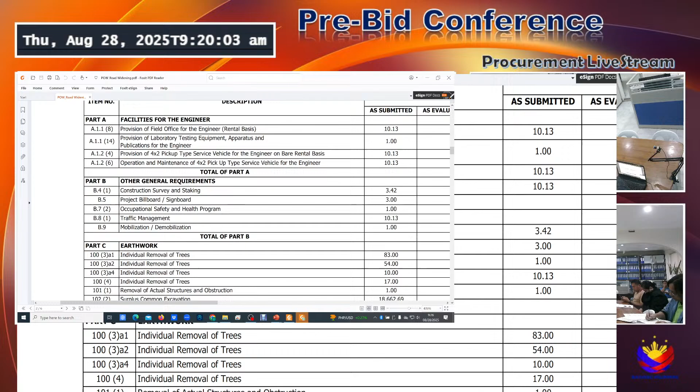I would like to emphasize this is actually item 1.1.11, which is provision of furniture, fixtures, equipment, and appliances for the field office for the engineer. Sorry for the error. With this item, these are the inclusions in this particular item.

With that particular item, 1.1.11, it includes the delivery of 3 specific units: desktop for special application use with complete accessories, 3 units; desktop for administrative application use, 2 units; and a 4-terabyte portable SSD, 1 unit. I would like to emphasize that during the preparation of your bid, make sure it is compliant with these 3 equipment items that will be delivered for our office, for the facilities for the engineer.

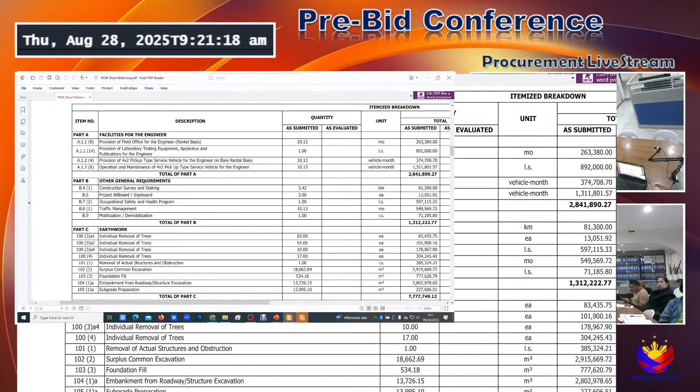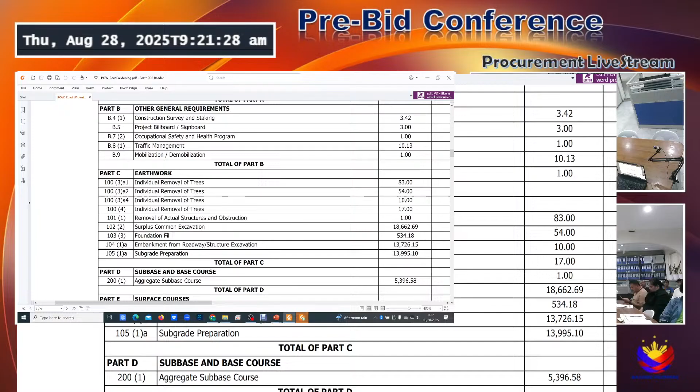We also have Part B, which covers the other general requirements, and these are the different items of work included in Part B. Also, Part C is earthworks, which includes removal of trees and other earthworks items. Part D is the sub-base and base course, and Part E is the surface courses, composed of Portland cement concrete, unreinforced.

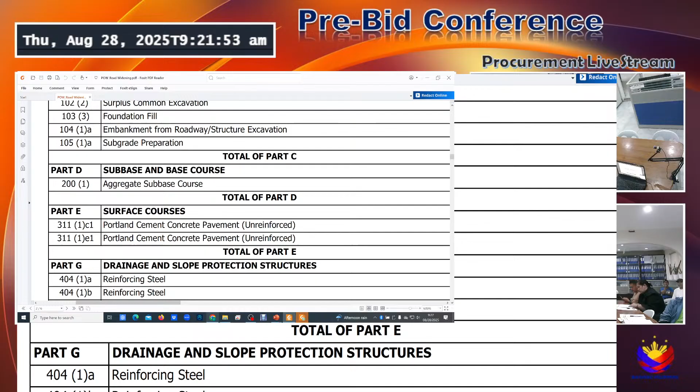This is actually 280 mm in thickness, and then the other one, item 311(1)e1, is actually 230 mm in thickness.

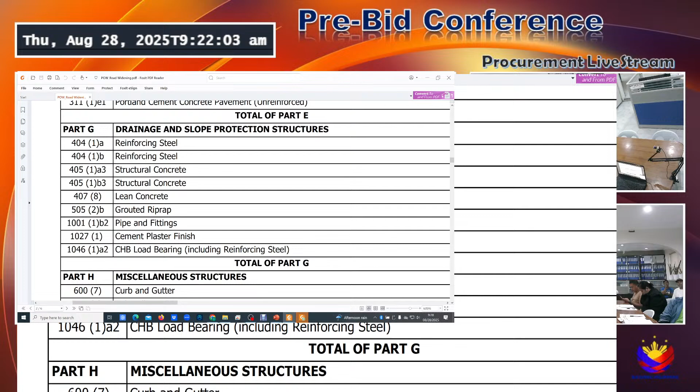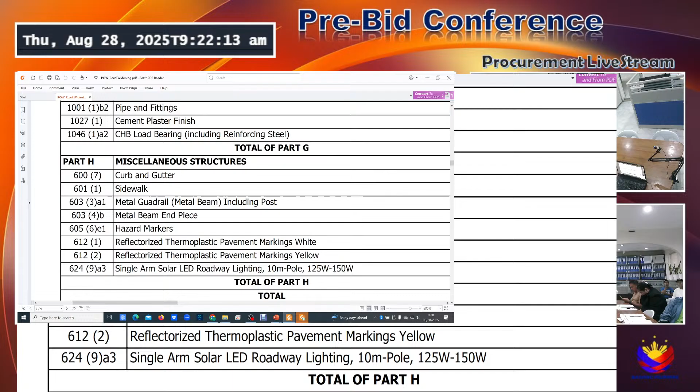We also have Part G, which is drainage and slope protection structures, and these are the different items of work included in that particular part. For Part H, we have the miscellaneous structures, which compose of the curb and gutter, sidewalk, metal guardrails, hazard markers, pavement markers, and solar LED lights.

For the DED plan, the particular station limit is from 1915+807 to 1917+498.75. So actually this limit is a gap of the existing widening in that particular area.

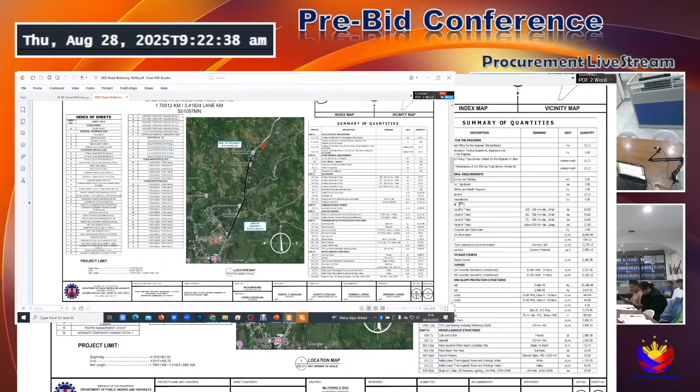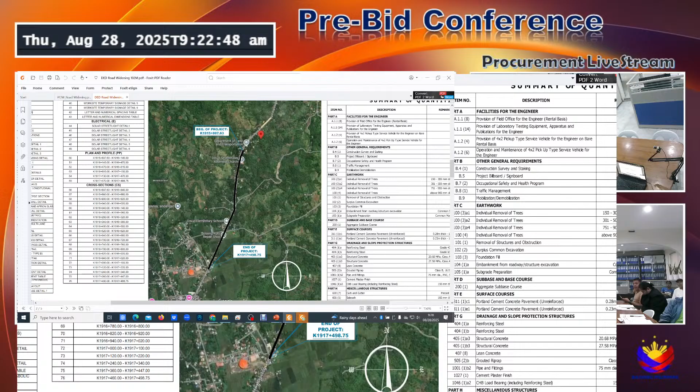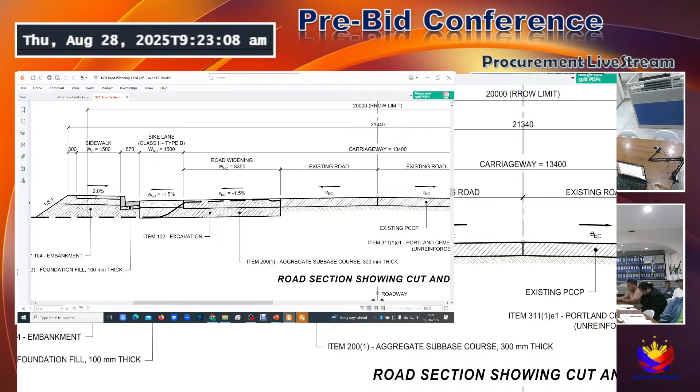For the typical road section, this is the typical road section of this particular project. Our road widening is a minimum of 3.35 meters. We also have a bike lane of 1.5 meters in width, and then for the curb and gutter, we have 0.67, and then for the sidewalk, 1.5 meters.

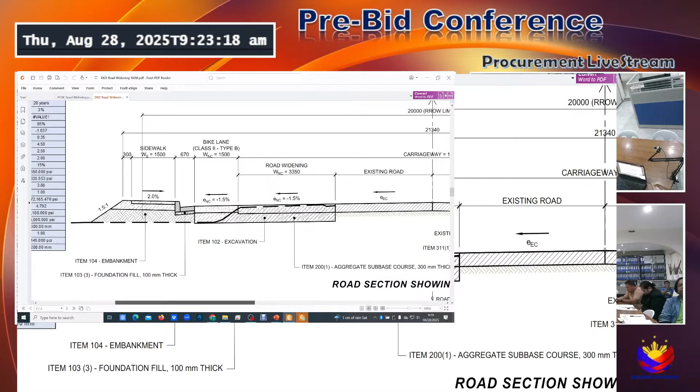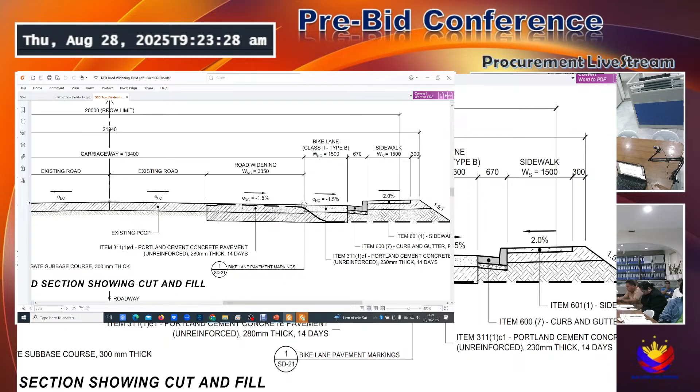For the thickness of the road widening, it is 280 mm in thickness. This is 280 mm in thickness. And then for item 311(1)c1, which is the bike lane, it is actually a 230 mm Portland cement concrete pavement unreinforced.

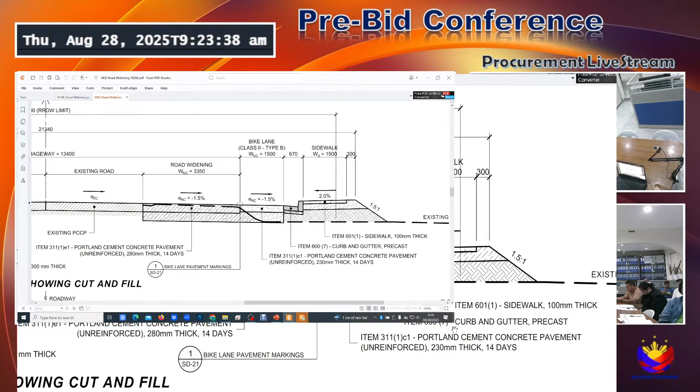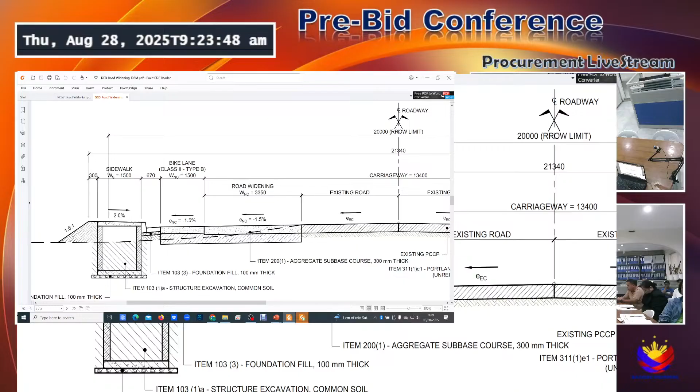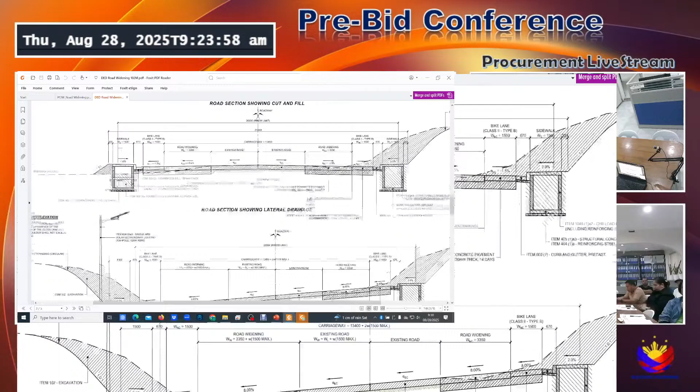And then for the curb and gutter, this is precast. For areas with drainage, so the bottom of our sidewalk will be the drainage system. This is our drainage system. The width is the same, 1.5 meters. And then we also have provisions of installation of solar LED lights.

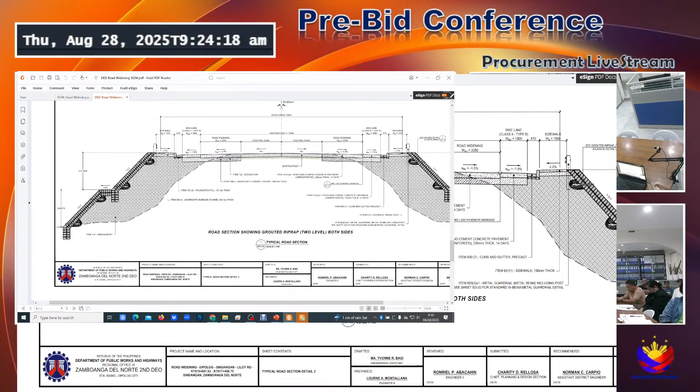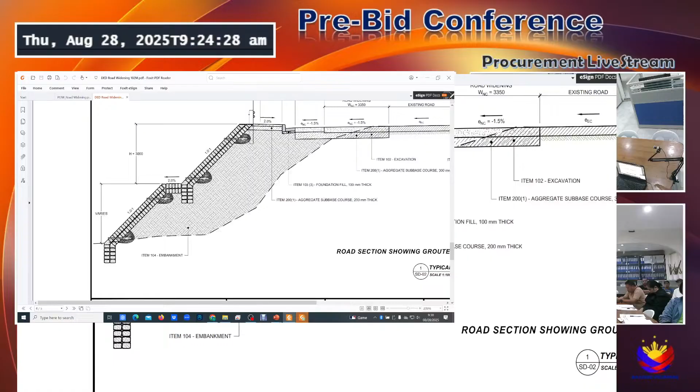And then there are also areas wherein we will be constructing grouted riprap. Thickness of this is 500 mm. For other areas, it is composed of two levels. The first level is 3000 mm or 3 meters. And then for the lower part, it varies on the stations and on the particular station where it will be constructed. There's also a provision for installation of guardrails.

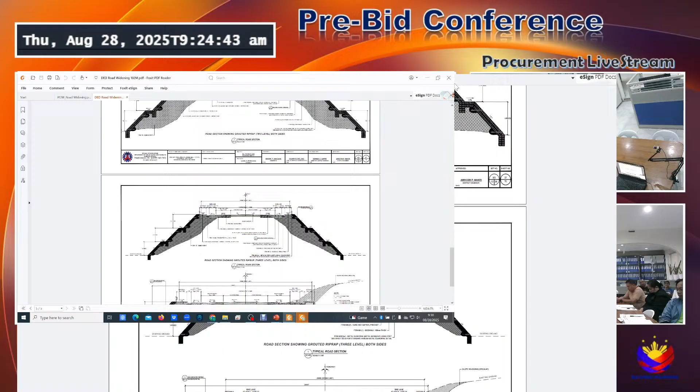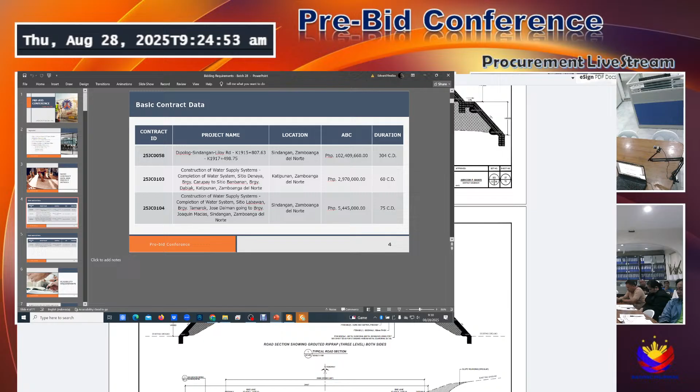So for the next project, we have contract ID number 103, which is the construction of water supply system. My colleague here, Engineer Maria Ibon Bait, will be discussing the details of this project.

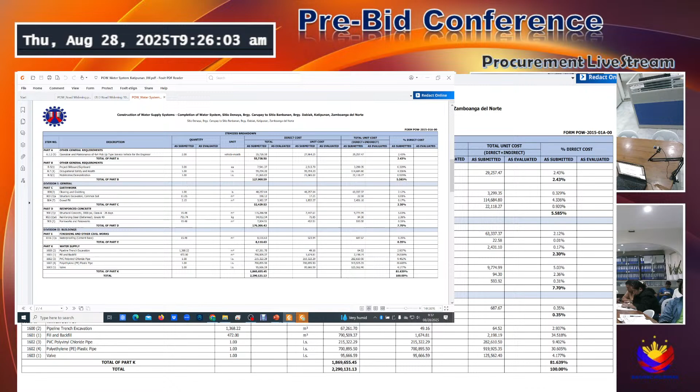Project name is Construction of Water System, Completion of Water System, Sitio Denaya, Barangay Carupay to Sitio Banbanan, Barangay Dabiak, Katipunan, Zamboanga del Norte. It is located in Sitio Denaya, Barangay Carupay, and it will end at Sitio Banbanan, Barangay Dabiak, Katipunan, Zamboanga del Norte.

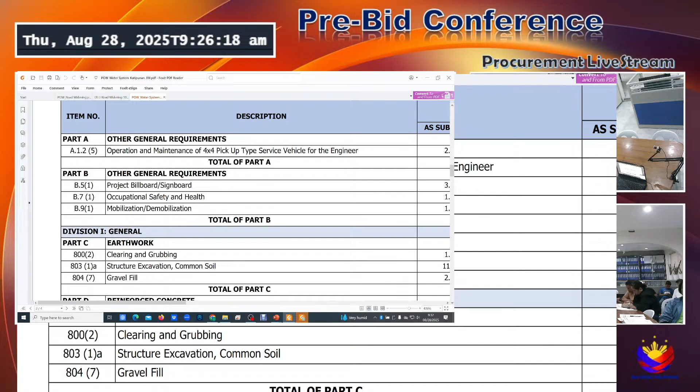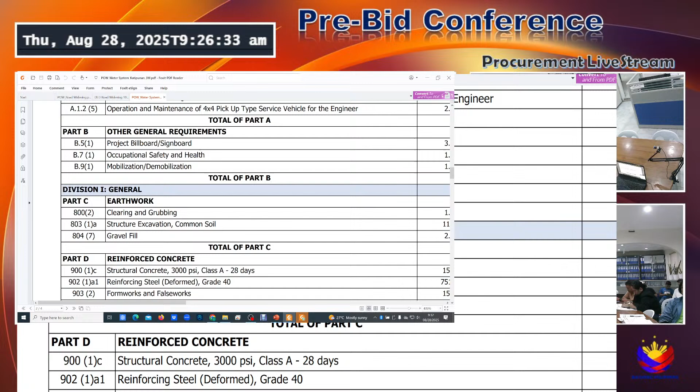For the items, we have Part A, the general requirements. We have A1.2.5, operation and maintenance of 4x4 pickup service vehicle for the engineer. We also have for the general requirements, project billboard, B51, B71 for the occupational safety and health, B9 for mobilization and demobilization. For the general item of works, we have earthwork, the clearing and grubbing, item 803, structure excavation of common soil.

We also have item 804, gravel fill. For the reinforced concrete, we have 900 (1)c, structural concrete. This will be used for the reservoir. 902, reinforcing steel, and 903, formworks and falsework. We also have for the finishing and other civil works, the waterproofing.

And lastly, we have the water supply, which is item 1600, item 1600 (2), pipeline trench excavation. We have fill and backfill, the pipes, PVC polyvinyl chloride pipe, polyethylene plastic pipe, and the valves.

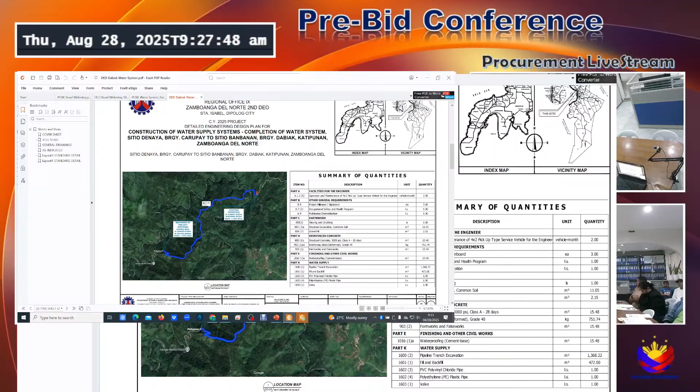For the DED, cover pictures. It is located in Sitio, in Barangay Carupay. It starts with a spring box, and then it will end at a reservoir, the existing reservoir.

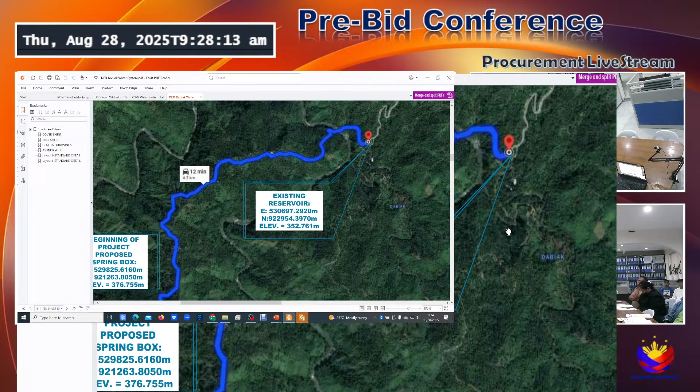For project ID 104, project name is Construction of Water Supply System, Sitio Labawan, Barangay Tamarack, Jose Dalman, going to Barangay Joaquin, Macias, Sindangan, Zamboanga del Norte. This is phase 2 of the 2024 project with the same project name. It is a continuation that will be located at Barangay Dalongdong to Barangay Imelda, Sindangan, Zamboanga del Norte.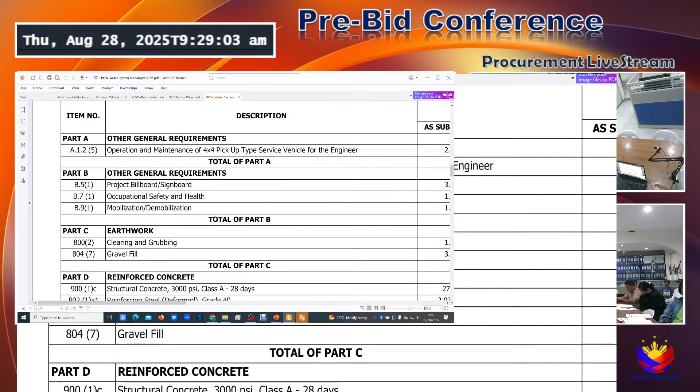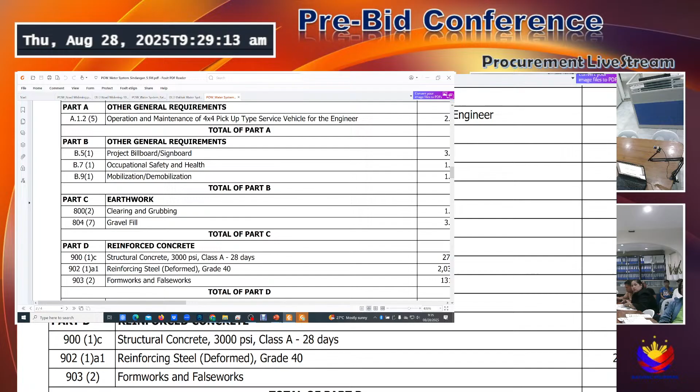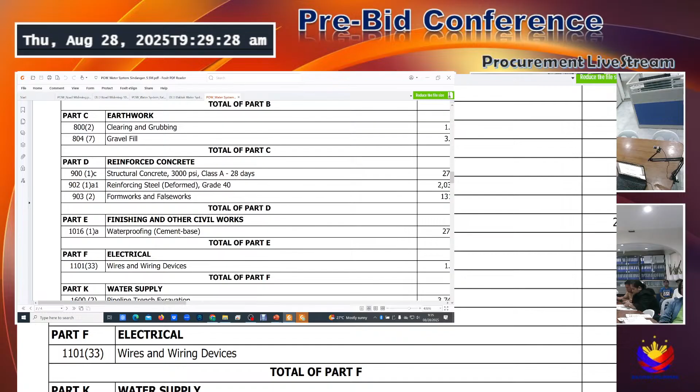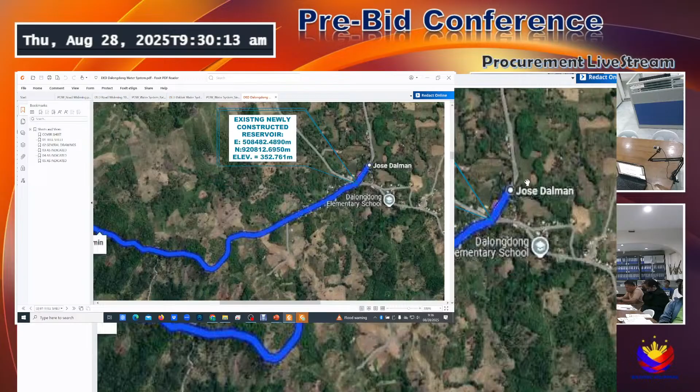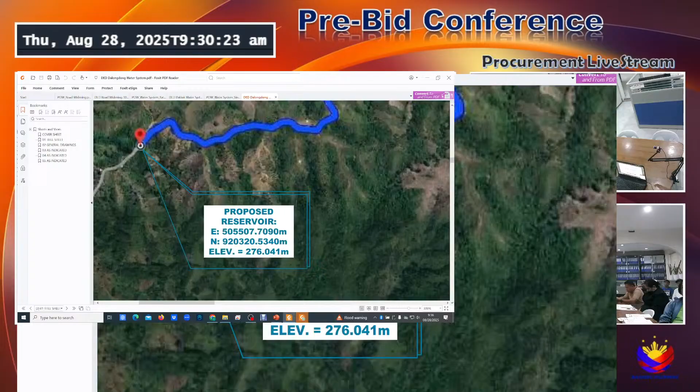For the DED, the location of the area is at Bago Dalongdong, starting from the exit, starting at the newly constructed reservoir down to the reservoir at Barangay Imelda, and the distribution pipelines in the community.

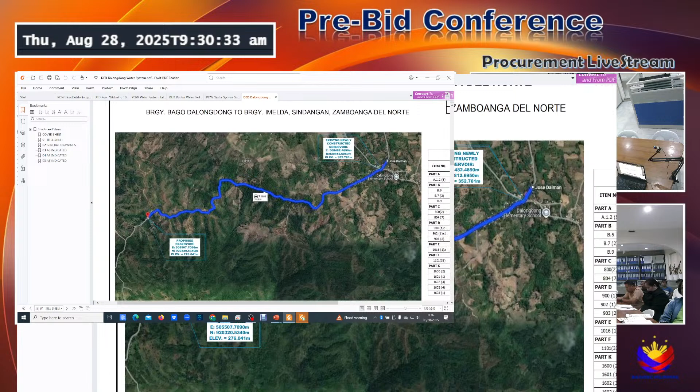Okay, that's fine. Yeah, that's all.

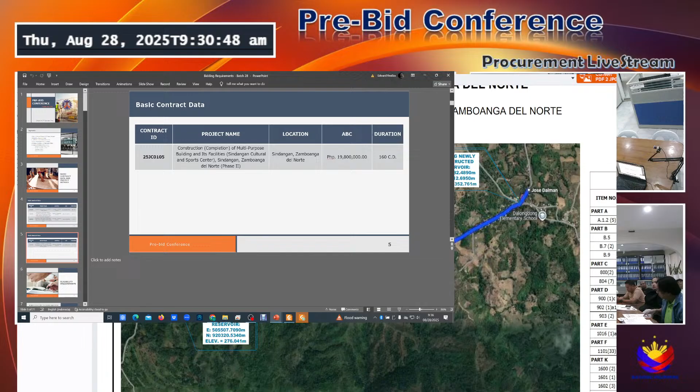Thank you so much. For the next project, which is ID number 105, construction completion, multipurpose building and its facilities, Sindangan Cultural Sports Center, Sindangan Zamboanga del Norte Phase 2. I would like Miss Jana Jane to present to you the details of this project.

Good morning, everyone. For ID number 105, construction, completion of multipurpose building and its facilities, Sindangan Cultural and Sports Center, Sindangan Zamboanga del Norte Phase 2. The scope of work is installation of perforated aluminum ceiling panel with sound absorptive materials, and electrical works. So for the item numbers...

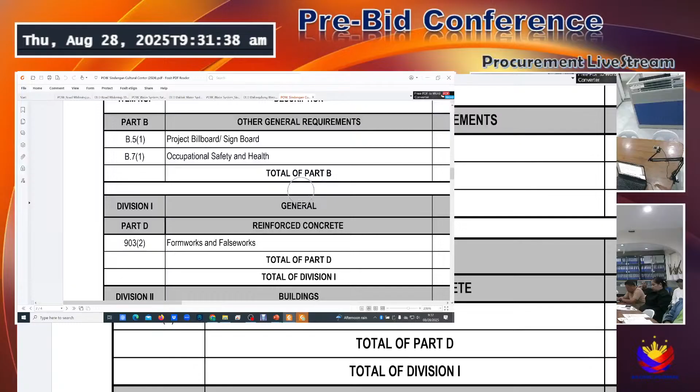For part B of your general requirements, billboard and occupational safety and health. For the general works, part D, reinforced concrete, specifically formworks and falseworks. In part E, finishing and other civil works focusing on ceiling. The last part is electrical, which includes conduits, boxes and fittings, wire and wiring devices, panel boards, and lighting fixtures.

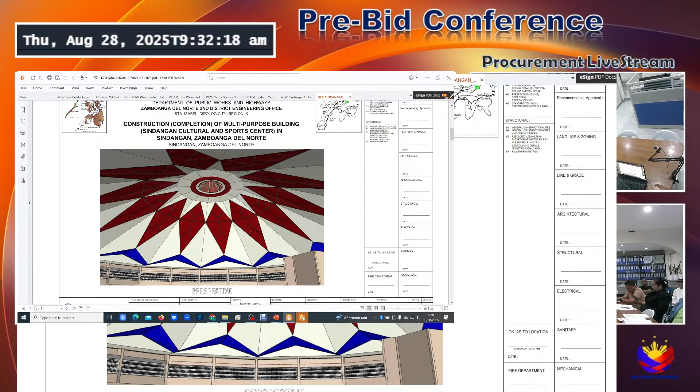So for the DED of Sindangan, it mainly focuses on ceiling works. Here is the perspective view of the ceiling.

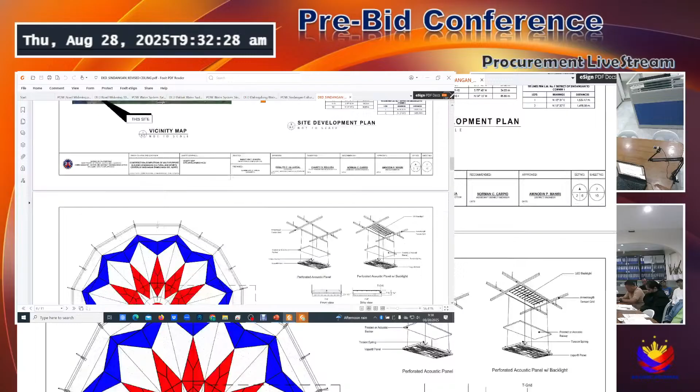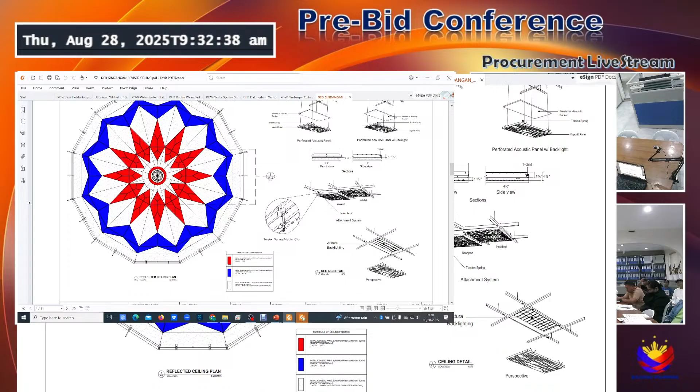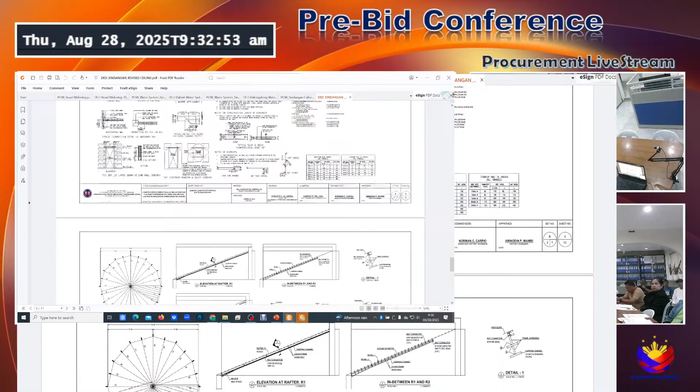Here's the reflected ceiling plan that shows the more detailed ceiling plan. It's almost just the scaffoldings, okay. Yes, thank you very much.

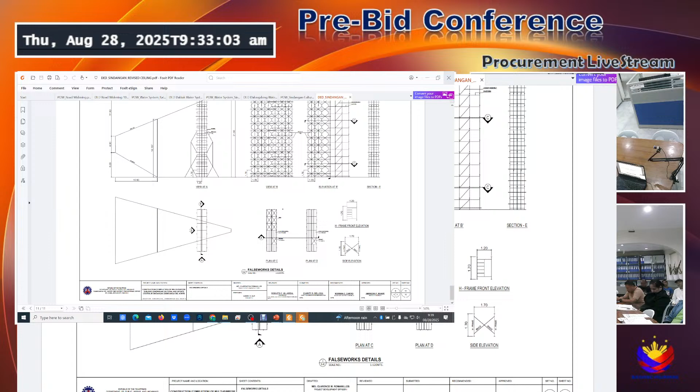Okay, so that's all for the specific details of these 4 projects. Now let's proceed to the documents comprising the bid of the bidders. So first, let us discuss the eligibility requirements of these 4 projects.

For these 4 projects, the PCAB license requirements are: for ID 58, shown on screen, classification General Engineering GE1 Road, size range must be Medium A. For ID 103 and 104, General Engineering GE4 Water Supply, size range Small B. For ID 105, General Building GB1 Building, Small B.

So for the technical component envelope, these are the documents comprising the technical component. The first one is your valid and updated PhilGEPS registration certificate. Make sure that your PhilGEPS is updated and all the documents as listed in your file are included.

The registration certificate from CDA, SEC, or DTI must be valid. Mayor's permit, the tax clearance, and also the PCAB license. And then your audited financial statement must be at least 2 years from the bid opening.

The next document is your statement of prospective bidder of all its ongoing government and private contracts, including contracts awarded but not yet started. You should use Annex O of CCSI, and these are the following supporting documents: the latest percent statement of work accomplished or percent time elapsed, contract agreement with copy of scope of work and contract cost and bill of quantities, the notice of award, notice to proceed, and for joint venture agreement stating the percent participation for the joint venture.

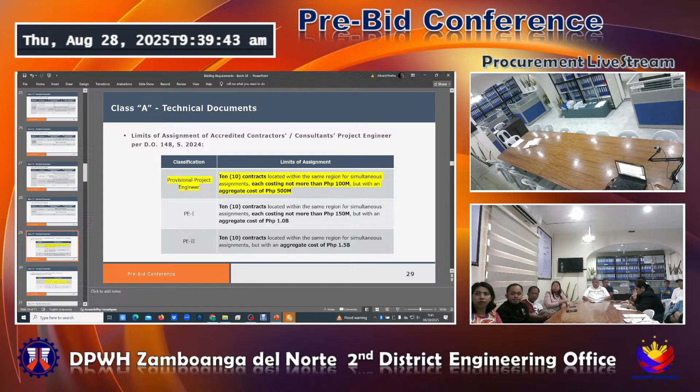And these are the limits of assignment for the provisional project engineer and the rest of the type or classification of project engineer. Make sure that your pledged personnel does not exceed the limits of assignment as required in DO 148 series of 2024. The same with the pledged materials engineer, we also have limits of assignment based on DO 98 series of 2016.

Another document to be submitted by the bidder is your list of contractors' major construction and material testing equipment using the prescribed form number 15, and then we have the supporting documents to be submitted. For our own equipment, copies of sales invoices, deed of sale, certificate of ownership, and registration certificate from the LTO. For leased equipment, certification only from the lessor that the equipment will be available from the contract once awarded. And under purchase agreement, certificate from the vendors that the equipment unit shall be available from the contract once awarded.

And we also have Department Order number 253, series of 2003, which requires that the concrete or asphalt mixes produced for use in our contract must be from accredited plants. So when the project requires a batching plant, you must also attach the certificate of accreditation from the BRS.

For the minimum material testing equipment, just refer to DO number 11, series of 2017, which lists the required minimum material testing equipment, depending also on the type of license you have, either small, medium, or large. These are the minimum major construction equipment for ID number 58.